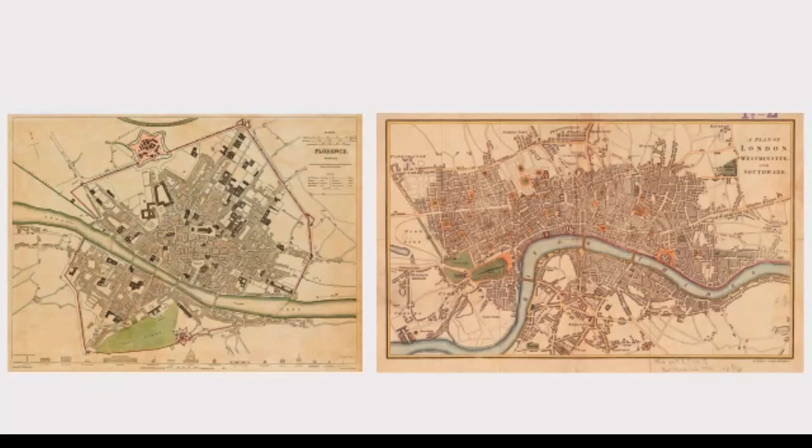By synthesising a century of urban theory with modern sustainability imperatives, we can create frameworks that both address that structured idea of big city ideas, but also can adapt and evolve to the community's needs over time and socially transform.

Back to modernist thinking, I want to start with a reference from 1947: Frederick Gibberd's master plan for Harlow New Town. It represented a synthesis of Englishness and modernity, combining radical ideas about collective living and local vernacular to form a distinctive civic modernity.

It was described as exemplifying a form of modern planning in which social betterment was secured through the creation of aesthetically pleasing, rationally ordered townscape. But it had its critics - Gordon Cullen dismissed it as prairie planning.

And it failed in some respects, in terms of the employment goals never being met - industry wasn't interested in locating there - and there are criticisms of the green wedges creating segregated suburban estates. Often those green spaces in between, illustrated perhaps best on the top right, were considered functionless green spaces.

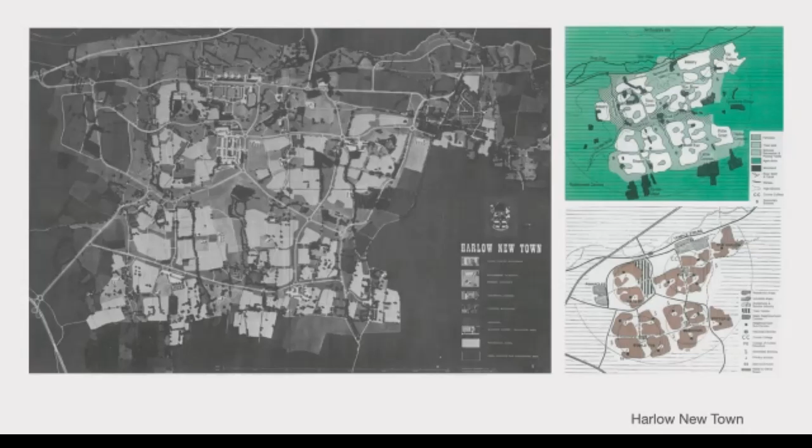But nonetheless, I think it's a really interesting diagram that isn't as diagrammatic or prescriptive perhaps as Corbusier's or even Ebenezer Howard's model, but actually more reflective of the setting, the context, and the landscape. So I think there's a kernel of an idea that we saw in this that we wanted to take forward.

So when we were invited by the National Infrastructure Commission to look at the Oxford-Cambridge Arc, it's a region that's estimated to grow by 1.9 million people over the next 34 years. We need to ask big questions about how we accommodate that - is that going to be more endless volume house builder sprawl?

And do we have the capacity or even the carbon budget to accommodate that? Or do we look at new compressed, condensed, compact, dense, vibrant urban settlements? So this diagram starts to show an idea of a series of city nodes that gradually over time grow and

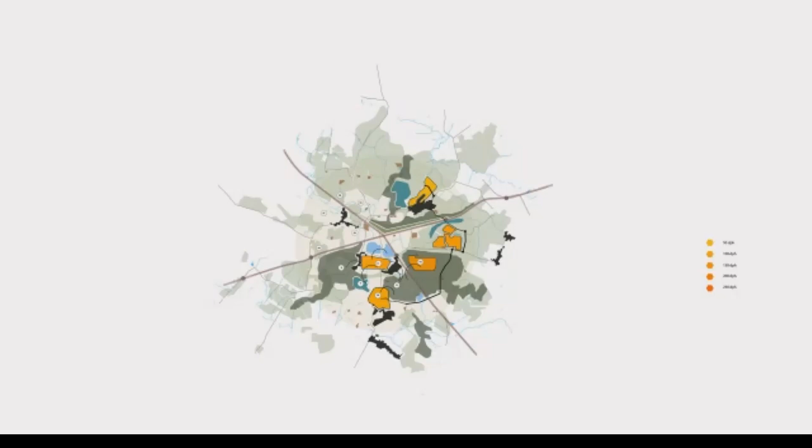are connected. And effectively, each node combines the employment access, the housing need, the civic infrastructure, but also is connected by transport infrastructure. And it forms over time like a constellation of stars, forming a network.

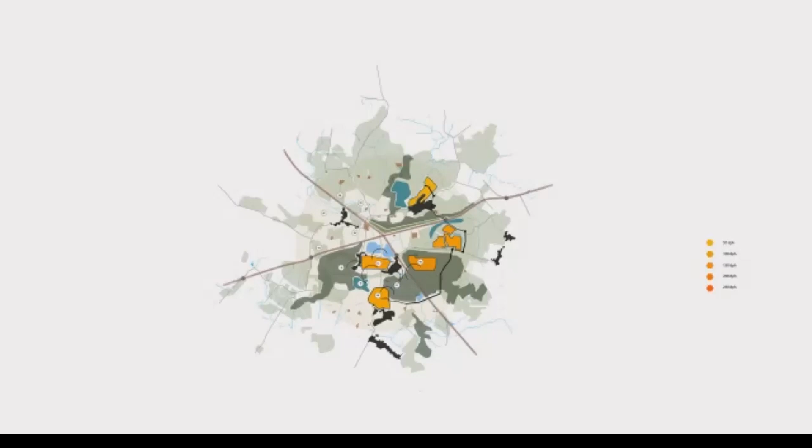It lies at the intersection between HS2, this line, and the Oxford to Cambridge railway line. And it was seen as a sort of ideal junction where good transport infrastructure actually extends the economic growth of this new town out to a much wider region.

And so by linking up with HS2 and other transport, this scheme can become part of an ecosystem that integrates London, Birmingham, Manchester, and Leeds, forming a dynamic region where goods, knowledge, and people flow easily between urban centres.

The model, as we see it, is not a rigid master plan, but actually a spatial framework that can adapt and flourish over time. It's a city that is a living system. It's always growing, it's always changing, but essentially the principles of development, its essential character, is established through this framework.

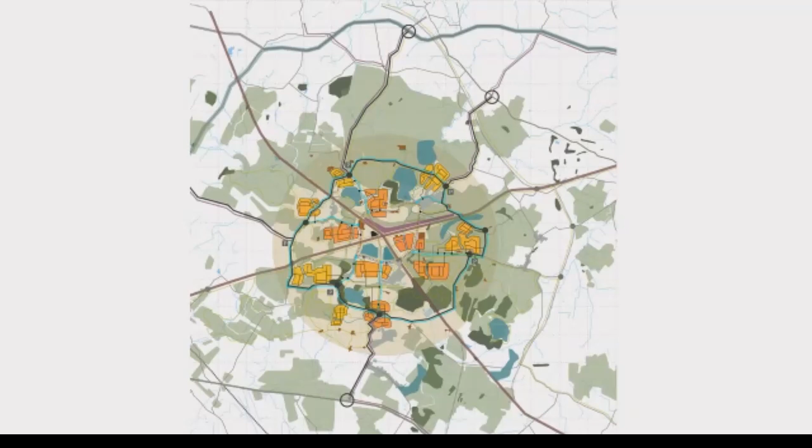Now, the framework looks very specific to the setting, but underlying each of these nodes is a set of principles around walkable neighbourhoods, about diversity, about connections with nature. It's a city that thrives on interconnection and diversity. Each node integrates residential, technological, social, and civic buildings.

And each can be programmed. Perhaps one's more about education and knowledge. Another one might be more about science and healthcare. But nonetheless, each can feed off that infrastructure and that network that the Oxford to Cambridge Knowledge Quarter embodies.

And between the nodes, it's a working landscape. It's not just an aesthetic landscape that divides suburban communities, but it's a working landscape that provides for these new neighbourhoods. And each neighbourhood is of an ambitious and specific density.

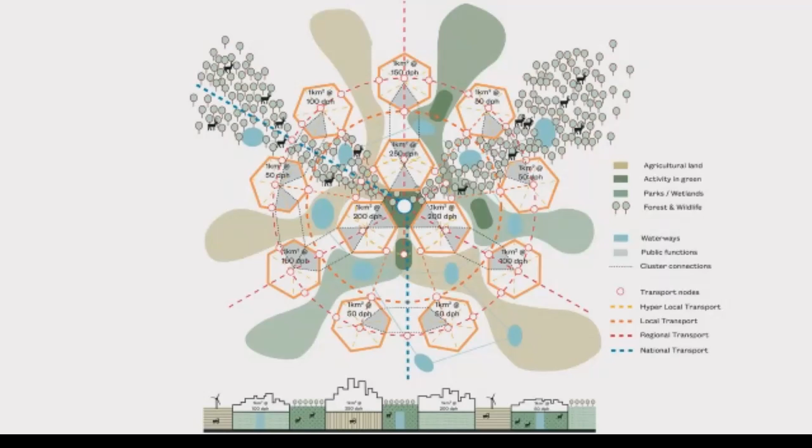Each is walkable, so it's a 1 kilometre squared neighbourhood ranging from 50 up to 250 dwellings per hectare. But nonetheless, each can have its own character and individuality. So the node forms a campus that has a clear border, a clear boundary, which is landscape. And each node can accommodate between 5,000 and 25,000 people. So each is a miniature town in itself, or neighbourhood.

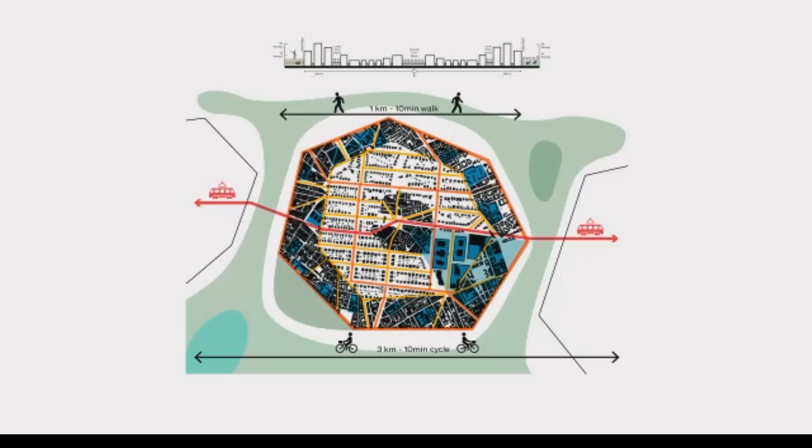Now, the inspiration isn't entirely Frederick Gibberd, but also historical parallels like the Roman settlement of Silchester. Here it suggests a very literal diagrammatic interpretation, the walled city being an almost octagonal form. But the principle behind Silchester was not to create a garden city, but to insert urban features in the countryside. It is a city in itself, and that was very much our thinking for the previous scheme.

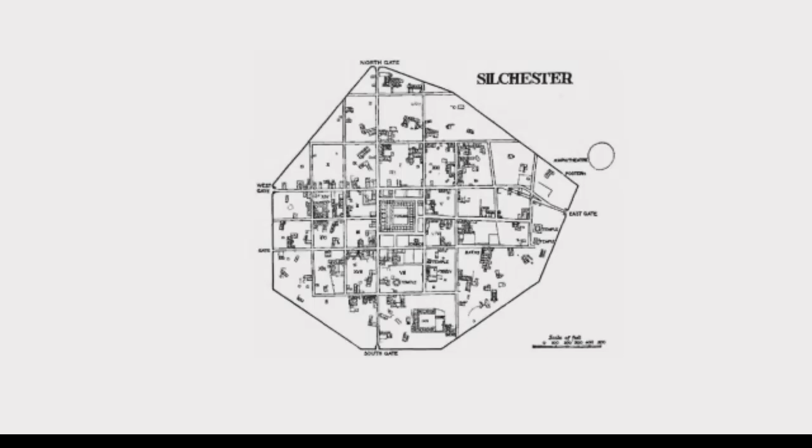Within the defined outer edges, the infrastructure by way of the road network is defined, the urban centre is defined, but actually buildings can loosely and organically congregate along those access routes and develop and respond to the needs as they change.

So moving from the city, we often don't get those sort of opportunities to think that big, so that was a bit of a one-off, I have to say, even though with the New Towns programme, I'm always trying to push that opportunity to stay involved in that.

More typically, we're working at a neighbourhood level, and I want to go back to the 1910 to 1930 period and start with the Berlin modernist housing estates, which testify to innovative housing policies from 1910 to 1933 during the Weimar Republic. It's a period when the city of Berlin was particularly progressive socially, politically, culturally.

And the estates, and I think there are now 11 UNESCO-listed estates, are examples of a building reform movement that contributed by improving housing and living conditions for people with low incomes, often through novel approaches to town planning, to architecture, and to garden design. And they've proved exceptional examples of urban and architectural typologies. They still feel fresh and engaging places today.

Bruno Taut, Martin Wagner, Walter Gropius, all involved as architects for some of these schemes and many others. And this particular example here, which you see me in the photo, I'm actually still wearing the same jacket even though the photo was taken about 10 years ago. This was for Building Design's inspiration piece. It's the Britz development in Berlin, which I chose as my inspiration.

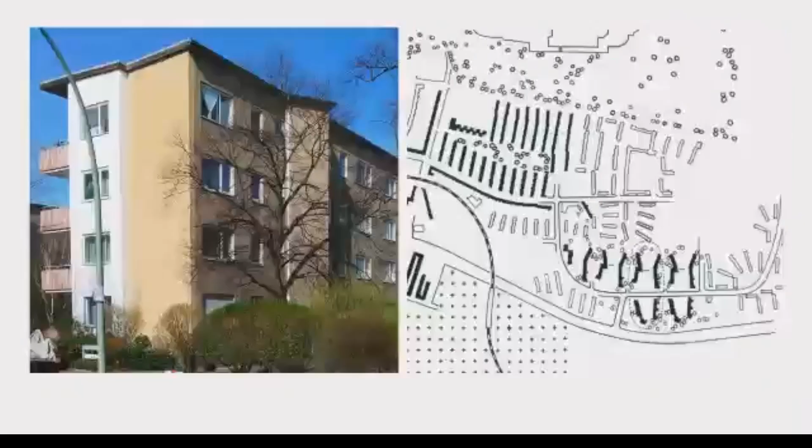Another example is Siemensstadt and also Charlottenburg Nord. Much bigger scheme, 18,000 homes, master planned by Hans Scharoun. And it followed the principles of neighborhood units. It's loosely related to Bruno Taut's concept of outside living space. It preserves the landscape and opens it up to surrounding gardens.

So Charlottenburg Nord, which is actually the area to the south, on the bottom of the plan on the right, is actually the bit I'm more interested in, which breaks the regular repetition of straight parallel blocks, and by cranking the blocks, envelops space, encloses gardens, as well as creating more diversity and a more livable, a more humane scale of development. So Hans Scharoun led this, but also architects like Walter Gropius, Hugo Häring, Otto Bartning, all contributed and helped shape the architecture of this place.

But I like the open-ended nature of these urban blocks, the fact that they don't follow the classic pattern of perimeter blocks that you see so conspicuously in almost every housing scheme today, the donut perimeter block, which shuts off daylight into the courtyard space. It reduces aspect and also denies passers-by the privilege of being able to see into those garden spaces.

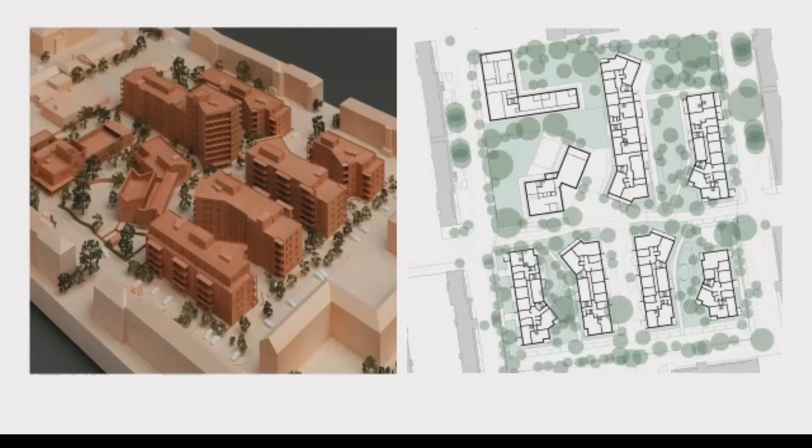So it was a source of inspiration when we were designing this scheme, which I'm pleased to say got planning approval last week after 4 years of working very closely with the residents on the White City Central Estate in Hammersmith and Fulham. It sits in the centre of this wonderful estate that was built interwar, which you can just see out of view, but it does have these linear tenement blocks that run north-south. And in the middle of the estate is a large underused area where there's potential for 250 homes, a new nursery, a new community centre.

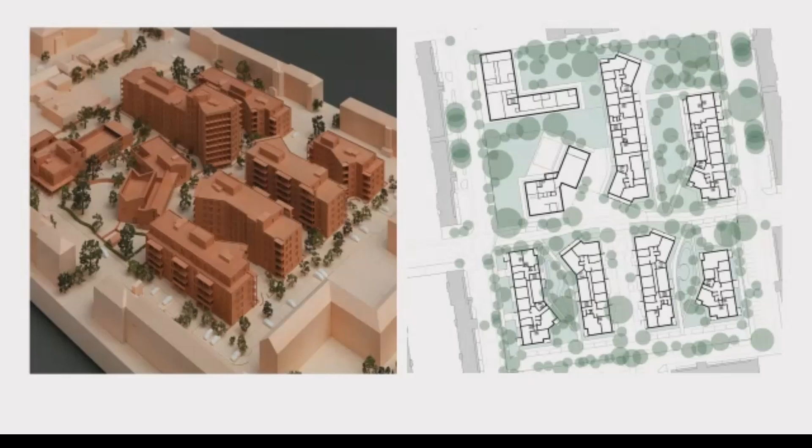And our approach here is to create linear blocks that allow views through. The loose geometry encloses gardens for the residents in between, but doesn't deny anyone access. It's not about creating levels of privilege or ghettos. It's giving equal access, but equally offering a sense of place by using geometry and simple enclosure to define legible open space.

So just to explain the scheme, we've got 6 residential blocks running parallel, and then that's the community centre, top left is the nursery, and then there's a public route that runs through it, Bridget Joyce Square, and it's a largely pedestrianised neighbourhood. A huge amount of green trees. Again, the cranks in the plan were designed to protect and keep as many as possible.

Just zooming in on the longest block, just to talk you through the plan and how that works. It's in clusters, so in this case it's got 3 cores, so that allows us to avoid the continuous long double-loaded corridor. It means that at every point here you get a through flat, so promoting dual aspect. And then also by cranking the footprint at the end, it also allows us to increase the number of dual aspect flats. So it creates that happy medium between efficiency and good net to gross that so many clients now demand, while still promoting good aspect, good daylight, and good cross ventilation.

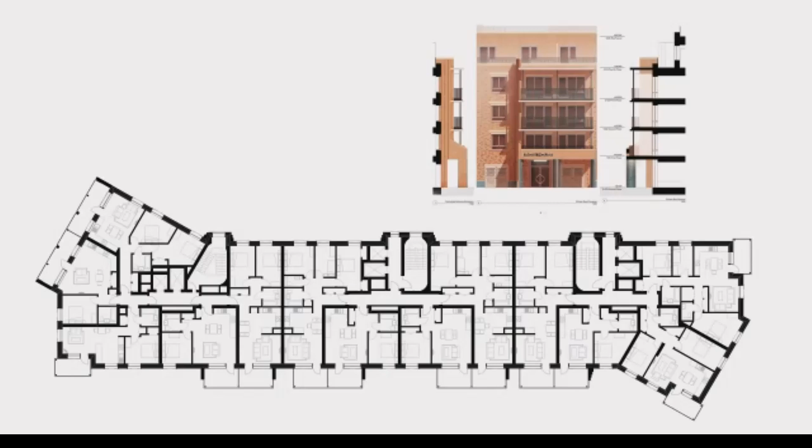And then just a bay study on the top that shows the emerging architectural expressions, simple brick architecture with, in this case, detached balconies that are self-supporting to reduce thermal bridging and improve the thermal efficiency of the architecture. And it's something that we're always mindful of, that balance between efficiency, reducing our carbon impact, and improving the accommodation for people's quality of life and well-being.

So these are the studies that we did for this project to compare the characteristics of a deck access block on the left, a double loaded corridor, second to left, and then on the far right side, our cranked block, which for us creates a happy medium between efficiency in terms of number of homes per floor, form factor, which helps reduce heat losses, and good carbon efficiency, so 0.86, which is not as good as a double-loaded corridor, but actually not bad.

But what it does achieve, much better than a double-loaded arrangement, is dual aspect. So it's 70 to, I can't see from this angle, 70 to 80% dual aspect, compared with probably 15 to 30% in a double-loaded block.

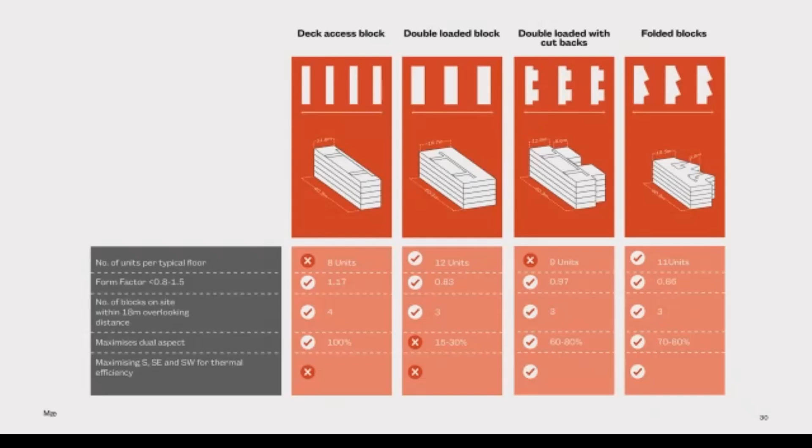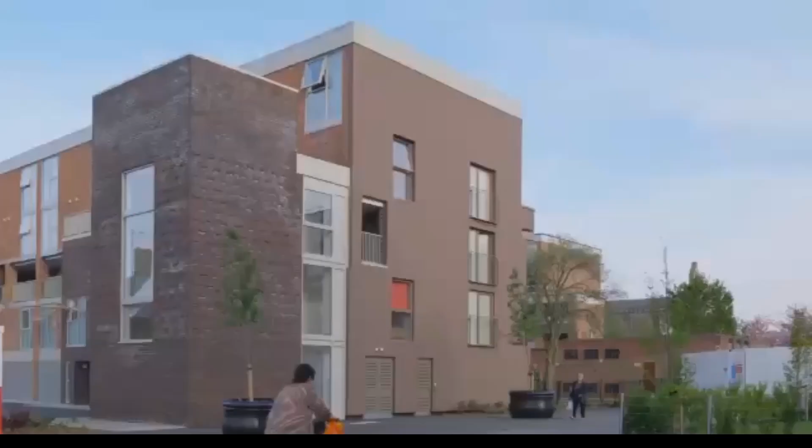And the new architecture is applied without ambiguity. You very clearly see the changes overlaid and grafted onto the historic architecture. And here, notably, you see the ground floor garages are now activated. They become front doors, new cores to the buildings above. In fact, every other garage becomes a bike and bin store, and then the alternate garage actually becomes an entrance to a flat behind, which we introduced.

So more small gains trying to overcome some of the urban problems of modernism, or at least this kind of modernism. And here, just to illustrate the point, the scheme had bedsits at ground. By converting that garage into a new entrance storage, it both extends and enhances that home. It gives them a new front door onto the street, and then the block itself has new cores which give it an address and give it identity and character.

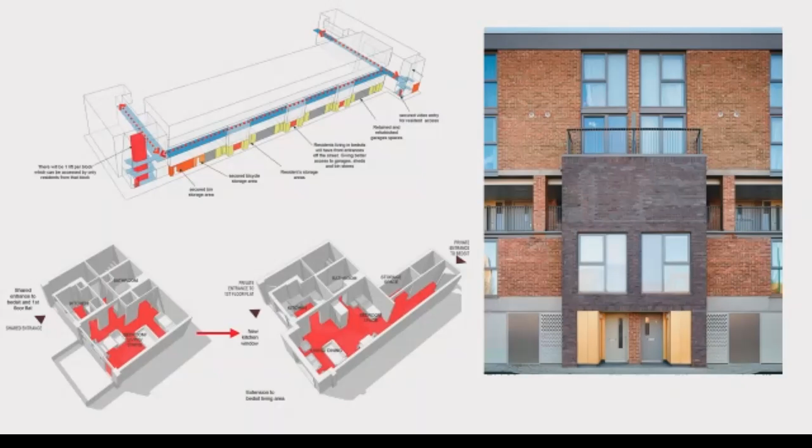Now, at the same time that Hillingdon Square was being built, an alternative approach to modernist thinking of estate design was being developed at the London Borough of Camden. You'll be well aware of developments like Alexandra Road, designed by Neave Brown in 1967, so the same time that Hillingdon Square was built. He was working for Sydney Cook and really adopting the heroic manner of the modern masters, but also recognising the urban syntax of terraces, of streets, of squares, derived from London urban traditions of the 18th and 19th century. And this project realised Brown's ambition to make a piece of city that was unmistakably modern, but also connecting with the cultural inheritance of the surrounding city.

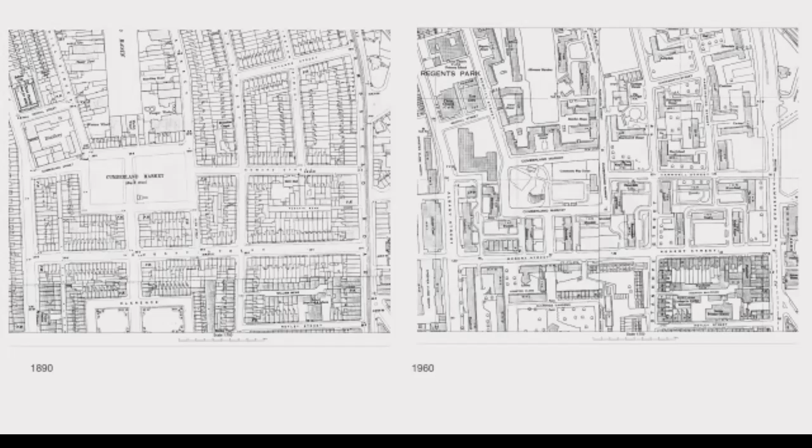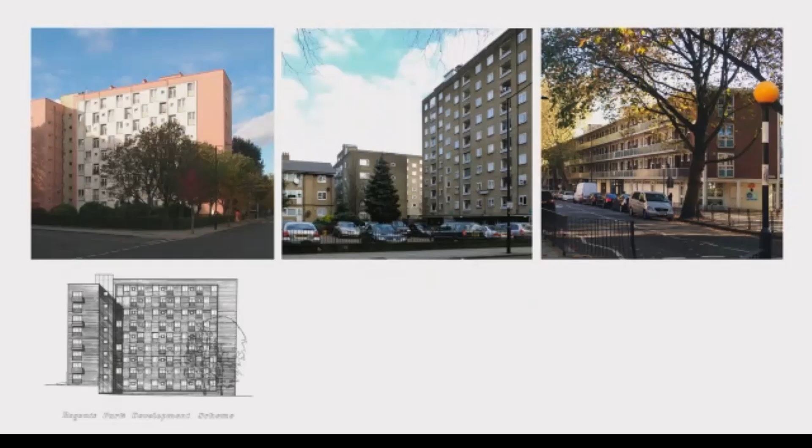And alongside Frederick Gibberd, architects like Armstrong McManus were working on schemes where even the likes of Jeremy Dixon, Edward Jones were working in that office from 65 to 71. So here we see Gibberd's work on the left and Armstrong McManus's work on the right. And this became the context for our project, which was to provide new housing for residents who are about to lose their home or be displaced by HS2 construction. So we needed to find sites within their vicinity so they could stay in the neighbourhood for new development.

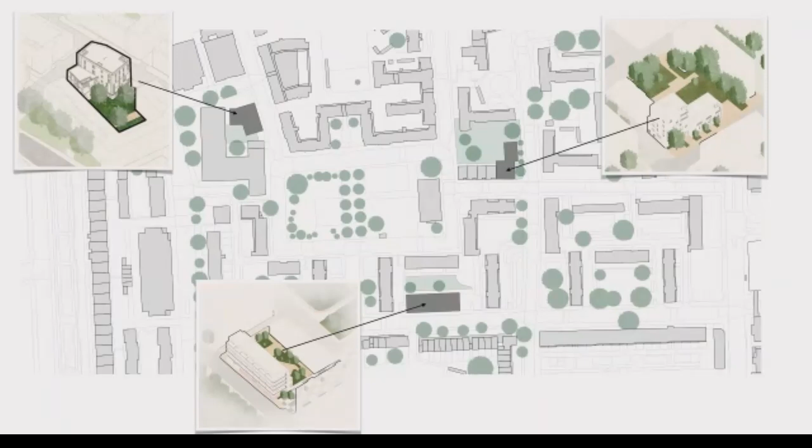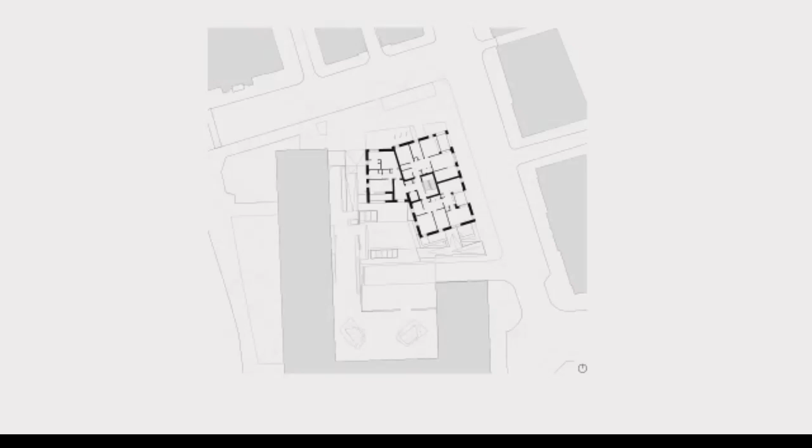And I'll just touch on 3 of the buildings, which we see as being like dental surgery. They kind of repair some of the broken urban grain. So the first one is Kentmere, and it sits at the corner of Redhill. It's an L-shape, which sort of creates the fourth corner in a U-shaped block, but stands apart from it. It remains independent and gives the original modernist block its own independence.

And here you just see how it harmonises in terms of its brick with the neighbouring architecture, but also through its grand scale, double scaled balconies, again, responds to some of the geometry and form making of its neighbour, and then stepping down to the Victorian architecture to the north, which you see here.

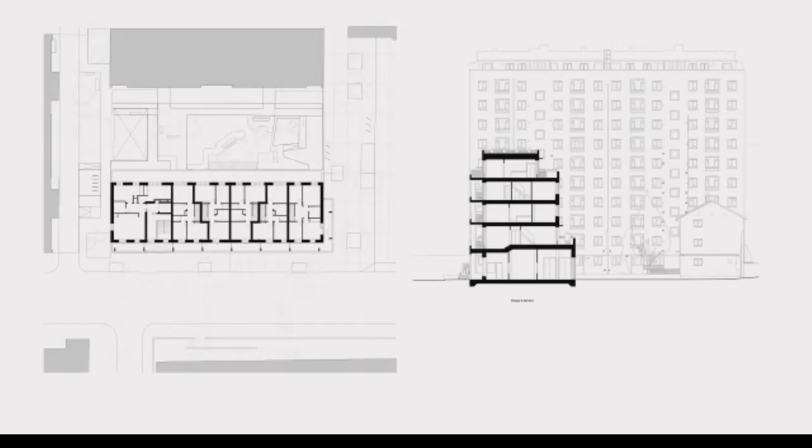The other block, Robert Street, or Kirkfell, which is on Robert Street, is a simple rectangular building that creates a continuous loggia on the outside. It's stacked duplexes with a community centre on the ground. And here you see a glimpse through to the Armstrong McManus building with its stacked duplexes.

But also on the right, you see the horizontal banding of the walkway architecture on the left, echoed and mirrored, in this case, by the balconies of our architecture on the right, which becomes more explicit in this view, where we have sort of piano nobile, so playing with scale and hierarchy as well. And then a sense of the balconies and quality of space. So really imagining gallery access architecture in a more convivial way to some of the 60s precedents.

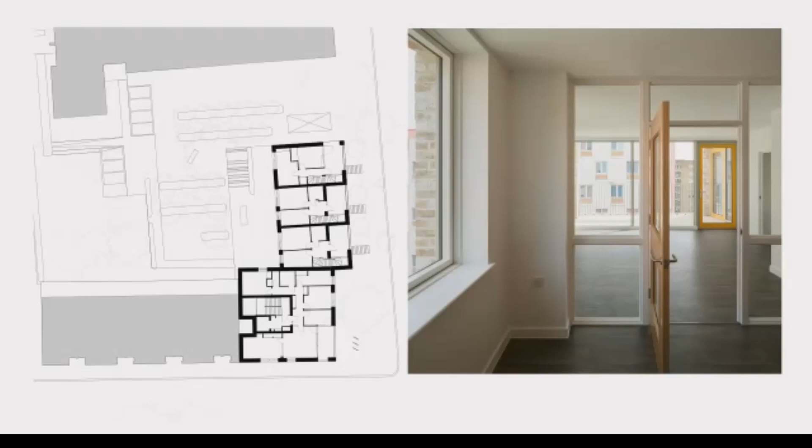And then the third block, Cowdale, again, makes reference in passing to Gibberd's work. Gibberd's buildings have this checkerboard facade, and we pick it up more loosely in the composition of this building that turns the corner on one of the building plots. And internally, this has 1 flat per floor in the apartment block and then a little terrace of 3 houses.

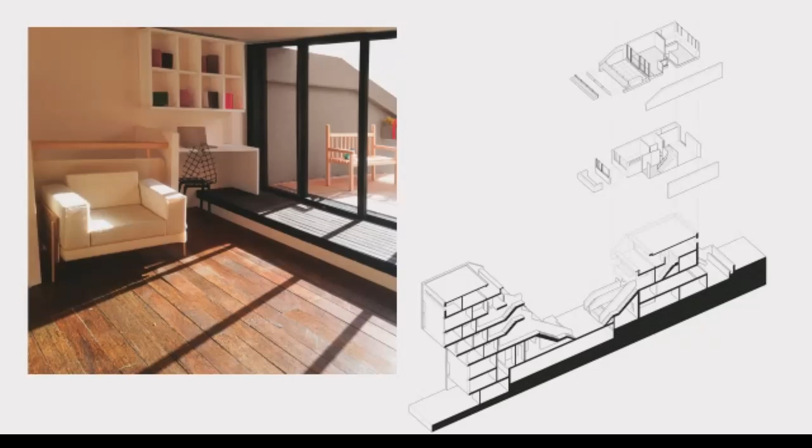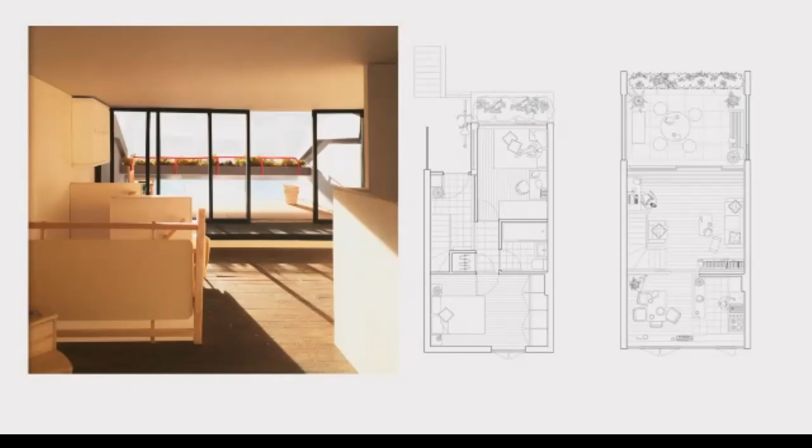But we arrange the rooms on enfilade, so kitchen, living, dining has transparent and glazed connection to the living room, which then connects to a similarly sized and scaled outdoor space, which for us, we were looking again at the likes of Neave Brown at Alexandra Road, where you get this lovely arrangement of almost 3 equally sized living spaces, the kitchen diner, the living space in the middle on the right-hand plan, and then a generous outdoor terrace that, again, feels like an outdoor room. And these beautiful models were produced by some of our students at Unit 5 at the London Met, and some here tonight.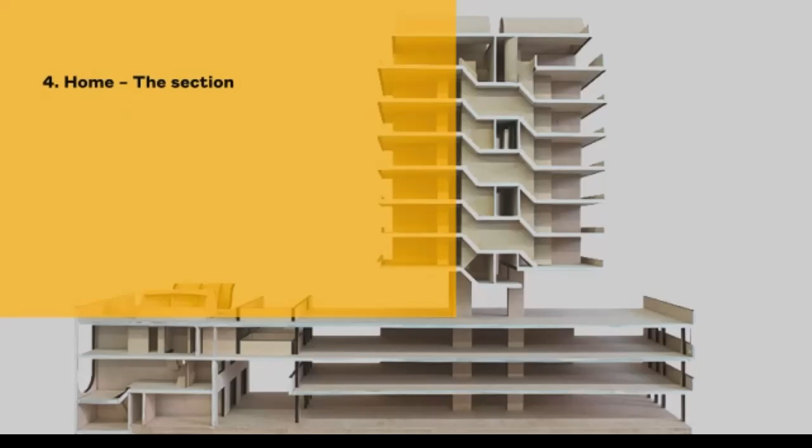So the next area of exploration is the section. And so much housing today is just about the plan. It stacks them up in a uniform way. And yet what I love about so much modernism is its interest and focus on the section. Agar Grove was built in 1962, or rather approved in 1962, designed by Austin Smith Partners, which at the time Mike Austin Smith was president of the Architectural Association.

The practice subsequently was renamed Austin Smith Salmon Lord, and the scheme was completed in 1966. Actually, just before St Pancras Borough became the London Borough of Camden, and when Sydney Cook's era at Camden took over. So it wasn't part of his commissioning because it was a different borough at the time. And as a result, I think it's not recognised as being the same quality and standard. And indeed, that's what the residents felt, because they voted overwhelmingly for redevelopment.

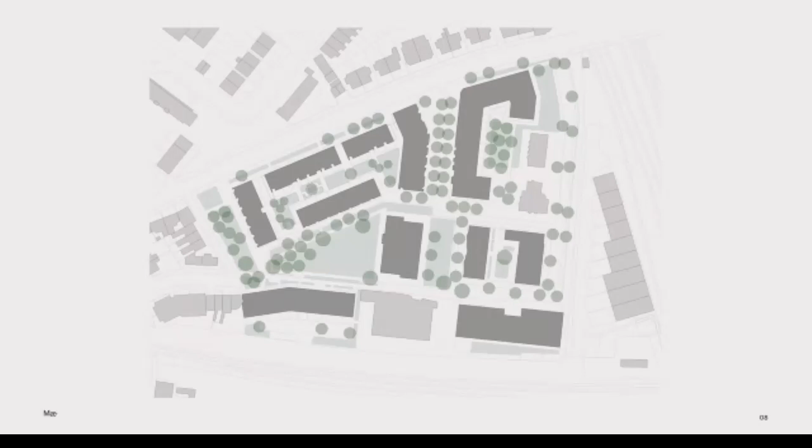So we were appointed alongside our partners Hawkins Brown and Grant Associates to develop a master plan. And really it's a scheme that is not about abstract geometry, but about responding to the urban grain, to patterns of daily life, to solar orientation, to social connection. It balances good solar gain for its passive house performance, but also layouts that support good streetscape and an urban response.

So I'm just going to flick through some of the houses. It's a huge diversity of houses, partly because we were having to respond to a very specific need of returning residents. Every resident on this estate got rehoused or was offered a house on the estate again, a brand new house to passive house standard, to much higher space standards as well, to modern London housing design standards.

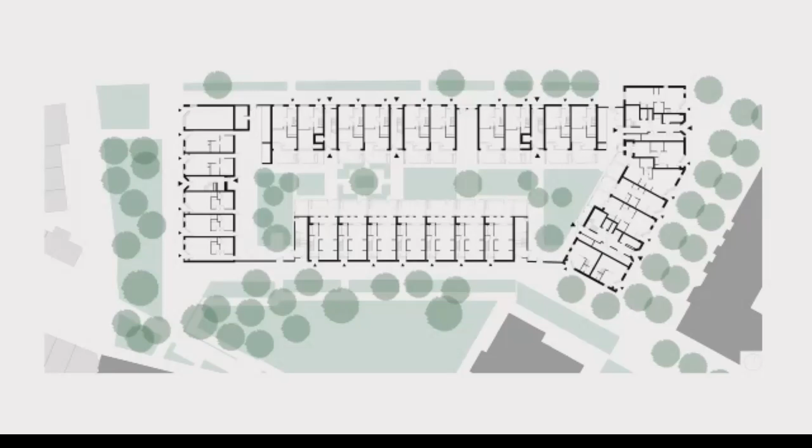And so this is phase 2, which we designed, and it's got 4 different types of development, which I'll just talk you through. While this is up, they show the ground floor plan, because although the ground floor dwellings all have their own private amenity, they all access directly onto a shared garden, which is secure for those residents within that development. And overall, it's 50% affordable housing, and every tenure shares equal access to those shared garden spaces.

So along Agar Grove, we have villas that pick up the rhythm and pattern of a Victorian building opposite, offering cultural continuity. The streetscape, you can see, is activated through front doors and dwellings that have direct relationship to the street. So there's a choreography of entrance sequences, front gardens, active ground floors, creating natural surveillance, but also opportunity for neighbourly interaction, as well as environmental engagement with its soft green borders.

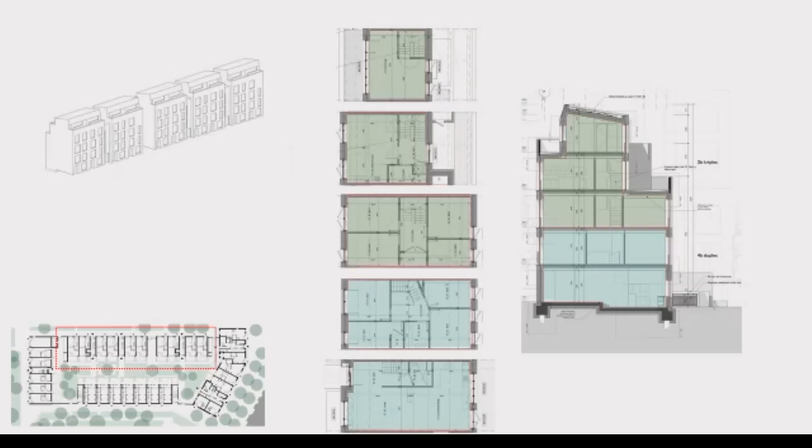And then in section, we have a level of complexity here. We've got a triplex above a duplex in this instance. So in the duplex, you come in at ground with bedrooms above, and in the triplex, you come in off a walkway at 3rd floor, and you come into your kitchen dining space, and you either go up to a living space or down to your bedrooms.

And then you get these wonderful connected internal spaces with light, both through the depth of a plan, but also light from above as well. So every opportunity to give a sense of extension and growth of the space, even though it's designed to efficient and compact space standards. And then here you see the ground floor garden and the shared garden between.

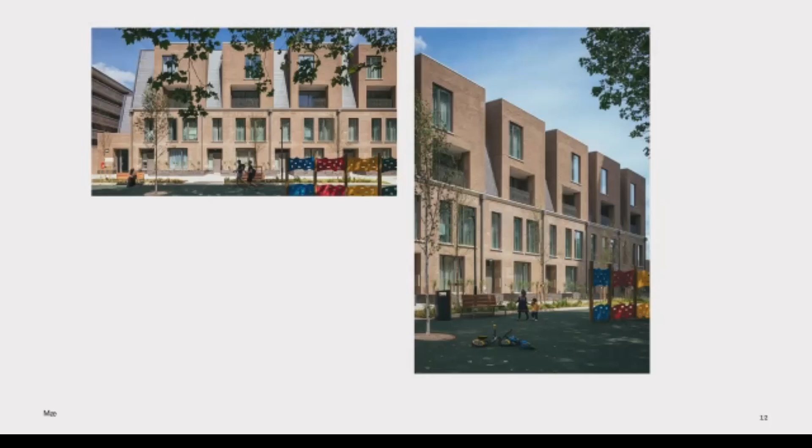Here on the south side of the development, we have 2 levels of stacked maisonettes. So ground floor maisonettes, again, accessed off the street, and then the maisonette above, which looks like a sort of cyclops sitting on the roof, is accessed through a gallery around the back. But actually it's designed to feel more like a terrace of houses rather than 60s stacked maisonettes. So here you see a duplex above a duplex.

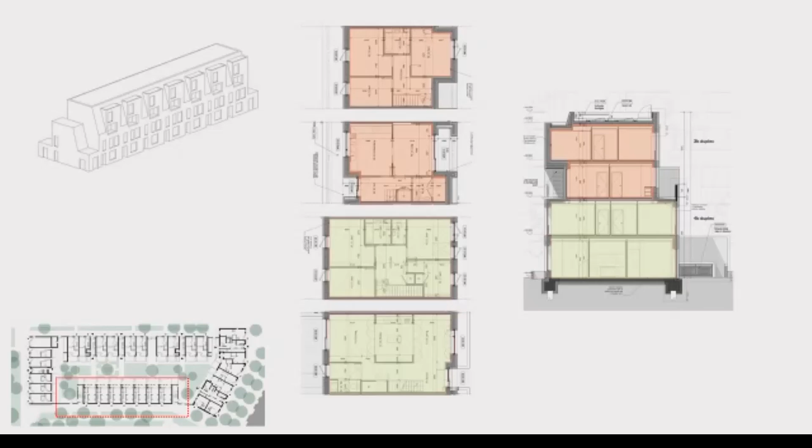And again, exploring the idea of the enfilade of rooms. Here you've got a living dining space, could be a living space, kitchen in the middle, living space at the back, and then a patio at the back. So again, flexibility to allow residents to determine how they wish to use those spaces. And here you see those connected rooms.

And then the third type, which probably pulls us back to the modern movement most specifically, is our explorations of split-level duplex apartments, which in this case don't have the visible sectional complexity of Neave Brown or Benson and Forsyth, because we have things like cold bridges that we take account of now. But nonetheless, it's designed to feel like a simple mansion block, but actually the gable starts to give away clues of the complexity of the section inside.

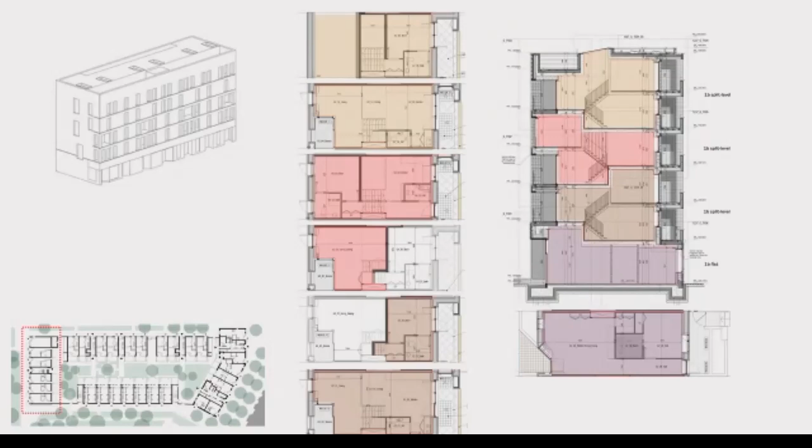And then at the other end of the bookend is a complementary block. And so internally, you get this section on the right, which has double height space for the ground floor dwelling in purple, and then it's got three split level duplexes above, which might become a bit clearer in the next section.

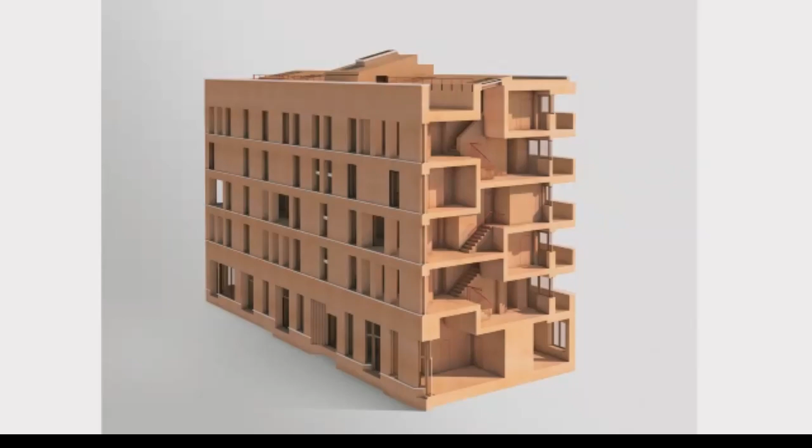The beauty of split level living is it gives a spatial generosity to the homes which are otherwise minimum space standards. You come in and either get a view up to the sky if you're ascending, or down to the gardens if you're descending. It creates this wonderful dynamic space internally, a real sense of delight and quality of life, and also allows flexibility about how those different levels are used.

Undoubtedly at the back of our mind is the work of Sydney Cook and his era. It's also been designed to passive house standard, which I probably haven't got time to go into now, but good environmental performance, energy efficiency, air tightness, thermal insulation, and good daylight and sunlight, so naturally cross-ventilated.

Each apartment is accessed off a gallery at the back, but the alternative gallery is actually just the means of escape, and it is private. So the bedrooms on that level only look onto a private gallery, so you don't have that conflict that you often get in modern housing of bedrooms onto walkways.

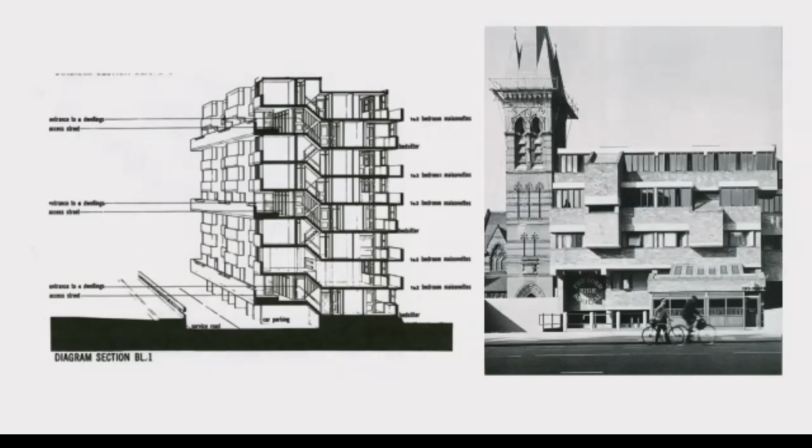But another obvious parallel is the work of Darbourne and Darke, who I've been a long admirer of. They worked through the 60s and 70s, developing a kind of public housing that restates particular English virtues of domestic architecture. Often at the time, councils were focused on system-build housing, whereas Darbourne and Darke quietly proved that some of the essentials of domestic life, like privacy, small gardens, good landscaping, can also be achieved at high densities in cities within a framework of vernacular materials.

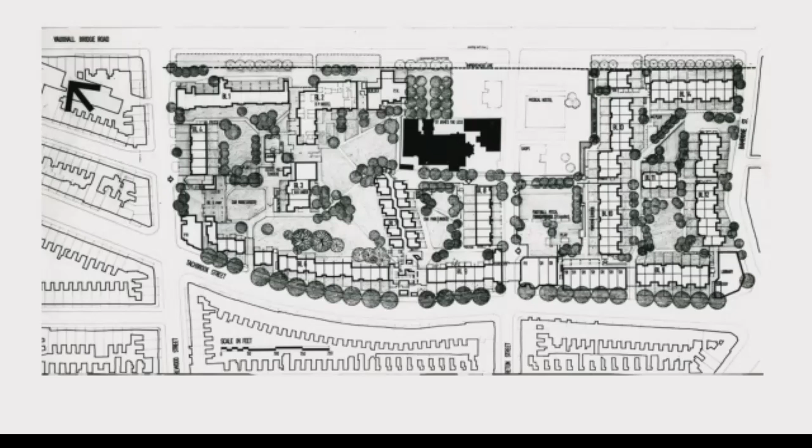Here you see Lillington Gardens in Pimlico, a wonderfully rich and complex scheme, won in open competition in '61, completed in '72. 200 dwellings per hectare, so a good dense scheme that alongside 780 homes has a library, community facilities, shops and gardens.

And again, studies by our students at London Met show some of the sort of spatial qualities of a split level arrangement in this scheme.

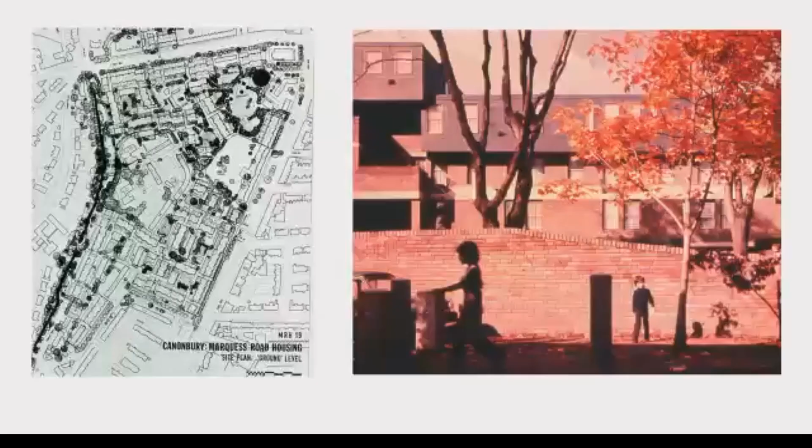Another scheme, Marquess Road, not so well tended or looked after as Lillington Gardens, but nonetheless some really interesting apartment layouts. Built around the same time, 993 homes, as well as...

Common spaces. But here, Darbourne and Darke were exploring the crossover section, not just the split section, but actually interlocking plans, which you perhaps see best in the red and blue diagram.

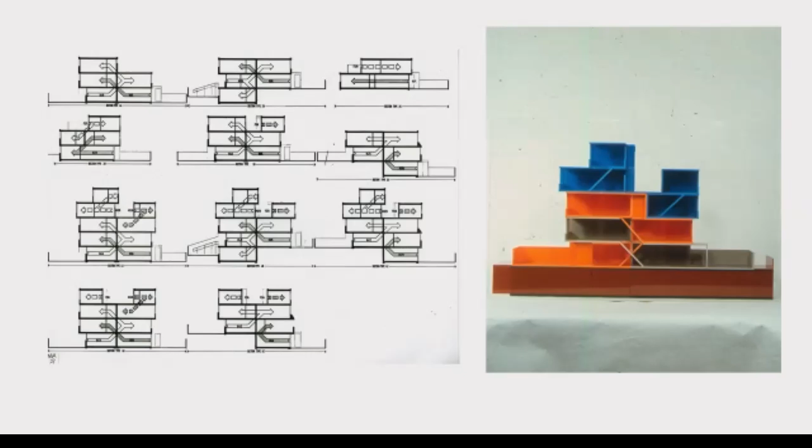And the principle here was that each home would have its own front door, its own outdoor garden, and through aspect and through ventilation. Living rooms could be lifted off the ground, and also there would be an upper street for those top floor dwellings.

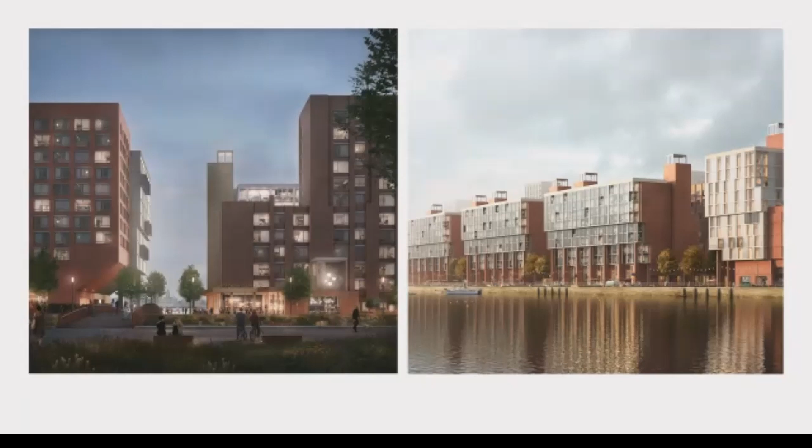So we experimented with crossover apartments on a couple of unrealised projects. And the first one was a proposal for the Liverpool docks. You can probably see other references, but Tony probably better described these in his James Gowan talks last week.

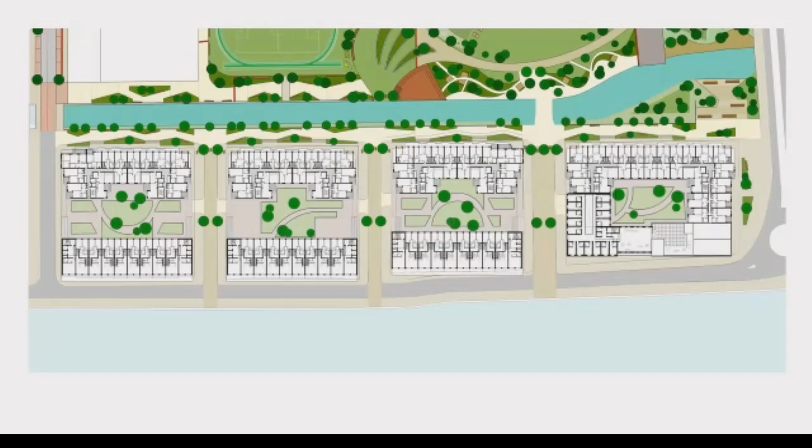But this was a proposal for an amazing site overlooking the Mersey, and we promoted the idea of these linear blocks that would run along the river, U-shaped blocks behind, and then a sort of mixed-use hotel and community programme to the right. But what's unusual here is that we wanted to afford as many homes as possible an opportunity for an aspect over the Mersey, over the River Mersey.

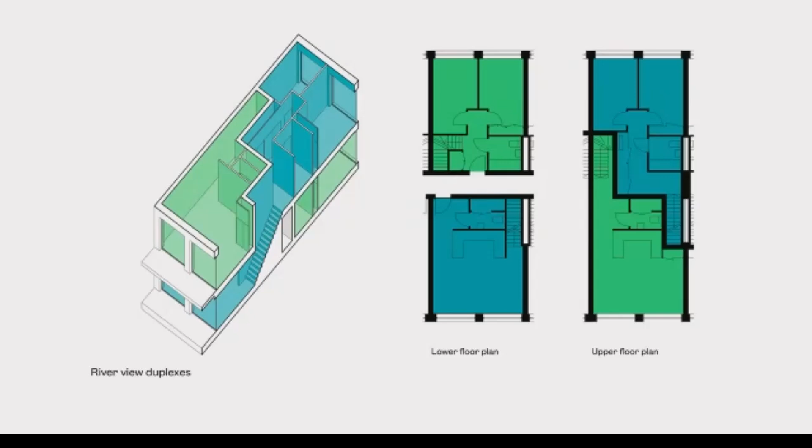So we designed these interlocking duplexes where you come in either facing away or towards the river, and the ones that are facing away come upstairs and then have their elevated floor overlooking the river.

Another scheme that also explored the crossover, also unrealised, but for Grahame Park, a large master plan which we worked on with Paul, who's joined us.

And here we were exploring crossover apartments in the mews that sits in between. And here the thinking was that homes could either be accessed from the garden side or from the street side.

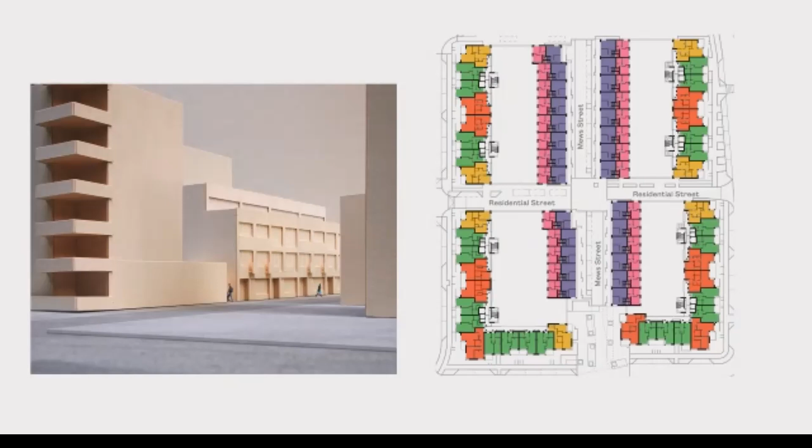So this rather, in fact the next will show the detail, but simple apartment blocks on the outside in yellow, green and red, but then the blue and purple start to reveal the complexity of the section of these dwellings, which again was about creating spatial diversity, helping activate both the street side and the garden side, and creating generous 3-story family homes.

Okay, so last 5-10 minutes, I just want to move on to the plan and form. Now, Tony trailed this project in his talk on James Gowan, so I'll bring it up again, and I know he made reference to our use of this project in our work. Brunswick Park School in Camberwell by Stirling and Gowan in '61.

It was commissioned by the London County Council, and it's a simple building. It's school, dining hall and assembly hall, designed to be flexible. And it's 4 wedges that pinwheel around, 3 wedges, and then the fourth side is a flat roof.

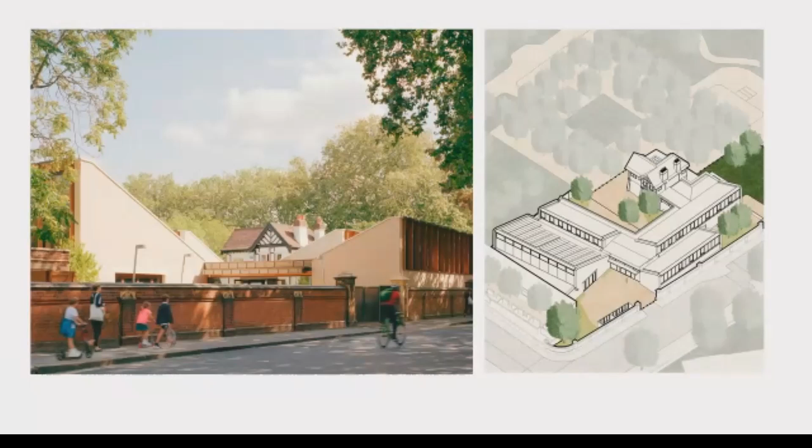I guess it's called plagiarism in our Sands End Arts and Community Centre, which sits in Fulham. It's a community building, and we were shortlisted for the Stirling Prize a couple of years back. And here you see, again, wedges, but not pinwheeled. This is much more integrated into the landscape.

So the wedges sit in parallel, 2 to the north, 2 to the east, and on the one side they frame a threshold or public space that gives access from the street and through the Victorian garden wall, and then on the other side they enclose a small private terrace that then opens onto South Park. And then Clancarty Lodge, seen through the pitches of a roof, was refurbished and retained.

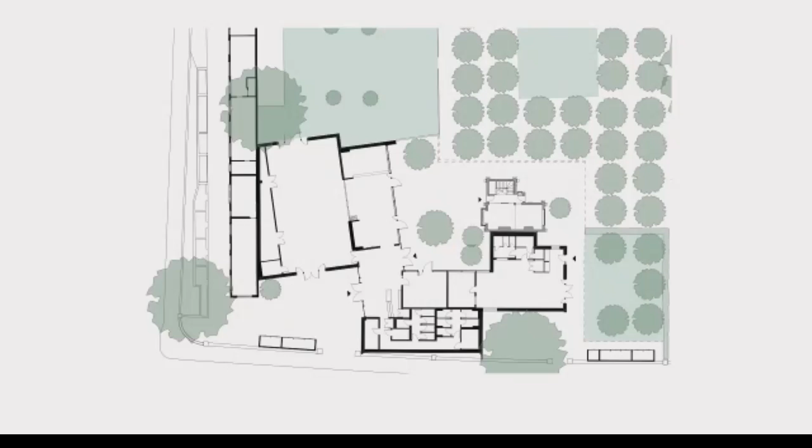And here you see the architecture. The soft yellow brick is made from waste. It's an upcycled product, so reducing about 28 tons of material that would otherwise have gone into landfill, reducing the carbon, and now increasingly becoming more prevalent. We're starting to see more and more made from waste materials. And here you see the timber shades to the clerestory glazing, which helps provide shading in low angle sun.

And then the park beyond, which is a wonderfully rich landscape, and it sort of nestles into its setting. And retaining the garden wall, which used to be a private house, and then was gifted by its owner. Initially, it was leased as a nursery and then gifted to the council as a park. And then here you see the inside spaces. So my last reference is

Säynätsalo Town Hall in Finland, built between 1949 and 51. You all know this one, Alvar Aalto. And he references the traditional European court and tower typology as the basis of civic architecture. The plan creates two contrasting conditions.

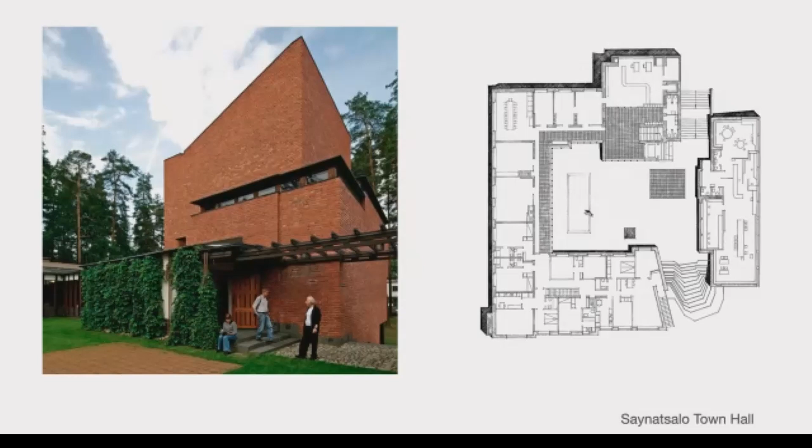Here we see the imposing two-story monolithic building in unornamented brick, and the C-shaped plan which encloses this wonderful garden on the raised courtyard side, which gives access to the library, to the offices, wonderful transparent space, again creating a quiet, protected garden space that's much more intimate in character.

Now, I accept that there's always a risk in following an Aalto masterpiece with one of our own buildings, but I've always believed that you need to stand on the shoulders of giants in order to see further and find ways to evolve previous models.

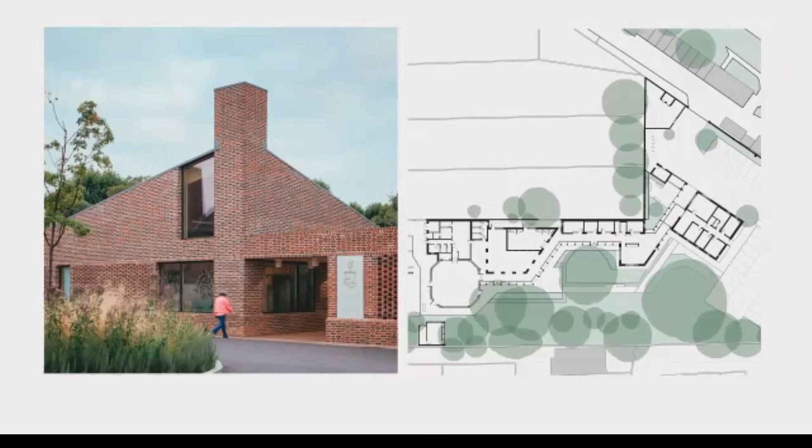It's not as coherent in terms of its plan as Aalto's town hall, partly because of the constraints of existing trees, back fences, and the site we had to work with. But nonetheless, there are ideas that I'll talk through that we believe are clear and legible.

And then on the opposite side to the brick pavilions is the garden side, with its cloister that runs through the building from one end to the other and surrounds this beautiful centenary cedar tree, which again provides a space for conviviality and a space for the elderly residents to meet.

This is part of an almshouse complex. In fact, I'll just show the next scheme. So Morden College, built in 1695 by Sir John Morden as almshousing, attributed to Christopher Wren, more likely Edward Strong designed. But it has this wonderful quadrangle, with the colonnaded ground floor, lively and animated pitched roofs and chimneys, perhaps better seen in the figure ground plan.

So the continuity between that architecture and ours is the borrowing of the colonnade, that in the case of the quadrangle is inward looking and geometrically distinct. Ours meanders and weaves through the building from this end through here to here.

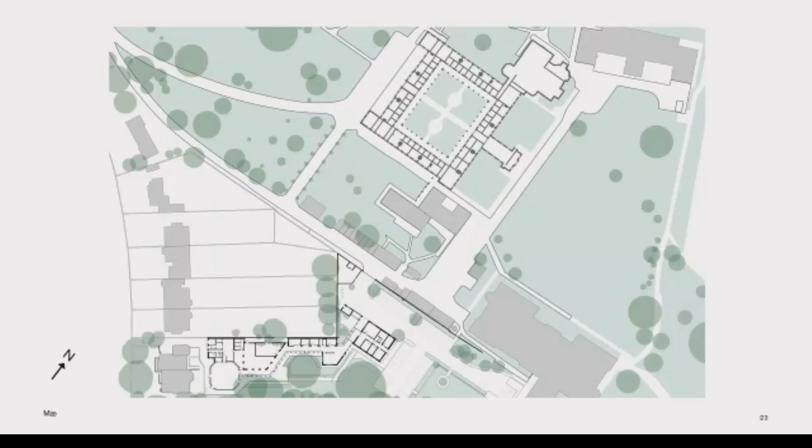As a result, you get quite a dynamic experience as you walk through, sometimes looking into gardens, sometimes into spaces. And then the buildings you saw earlier, the pavilions, pick up some of the brick pitch roof architecture. It's also cross-laminated timber, with these pyramidal forms.

So they become a family of elements. Here we've got the health centre, a reception area, offices, shops, art space, restaurant and cafe, and then a theatre space, and the cooking facilities at the back.

It's very much designed for the elderly residents who live in the college, intended to be a community hub, where people can live a good life in their later days and really thrive into old age. We know that anxiety, depression, a lot of illnesses come about through loneliness and isolation.

And this is really trying to do the exact opposite. It's trying to create a space where residents can connect, feel supported, develop programs of art, culture, events and activities, and support each other.

And it's really wonderful. Every time I go, there are different activities going on. But all the spaces connect, and by opening up the art room here to the cafe, people have actively got engaged in some of the activities that they wouldn't have otherwise taken part in. So we know it's already had a positive effect on people's welfare.